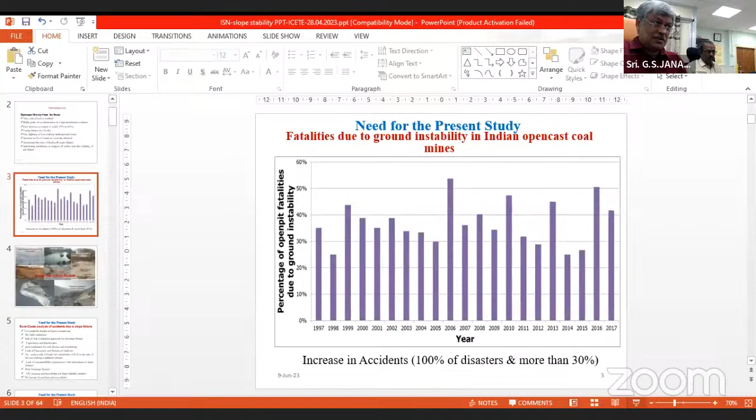So again I have to repeat all those things. As I said, open cast mining accounts for most of the production in India, and even in other countries.

In India mostly 95%, in other countries 85%, 75 to 80% comes from open cast mining only, because it is a cost effective method, and underground mines are loss making. Advanced technologies, from exploration to transportation of the ore, allow you to automate it because of IoT technologies.

With manless drilling, manless shovels, manless dumpers, and manless trains also, that are operating. If you go to Australia, there is one mine where everything is operated with digitization only. By sitting in a room, you can operate shovels, drills, and dumpers. That much technology is available.

Because of that much technology, open cast mining is going deeper and deeper. We can see in future up to 1,000-meter depth also, because of the new technologies that we are inventing and discovering.

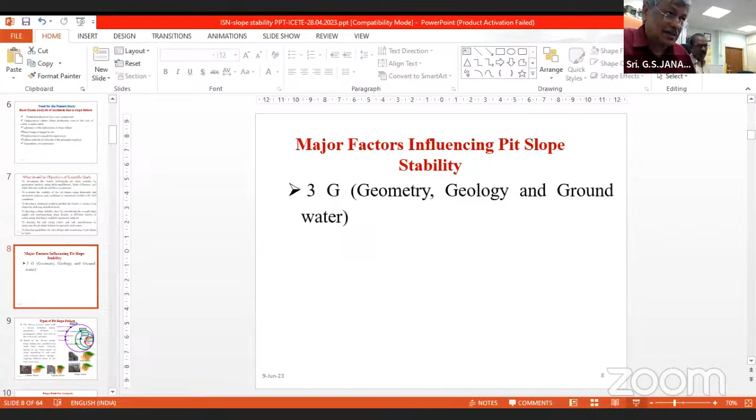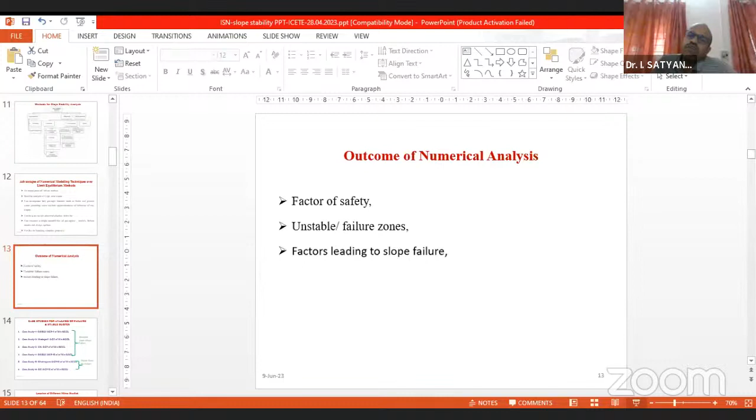Okay. The major outcome of the numerical analysis should be not only the factor of safety. What are the factors that are leading to slope failure? Where are the unstable or failure zones happening within this section of the strata? That we need to observe. Most of the studies, if you see, they give the factor of safety. That is not the major area we need to be concerned with. What is the strata where the failure is happening? That strata we need to consider. We need to stabilize it, like using shotcreting, using rock bolting, using cable bolting; like that we can stabilize it.

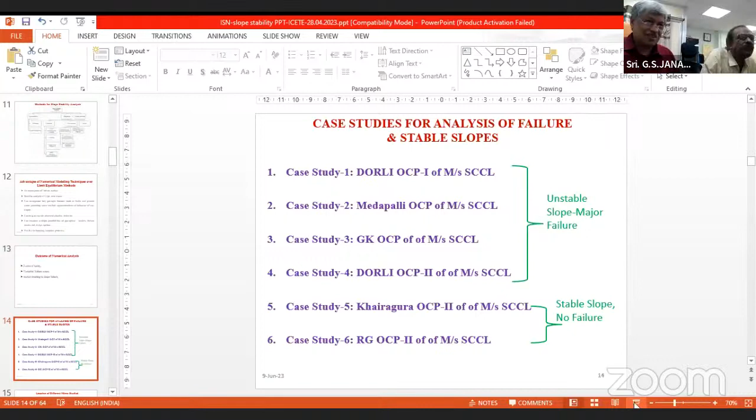So now I am going to the 14th slide. Is it visible? No, sir, 13 is visible on the screen. Otherwise, I will do like this only. Yeah, now the 14th slide is visible, sir. Okay, I do not go to the slideshow. Slideshow is not showing it. I will make it bigger, full screen.

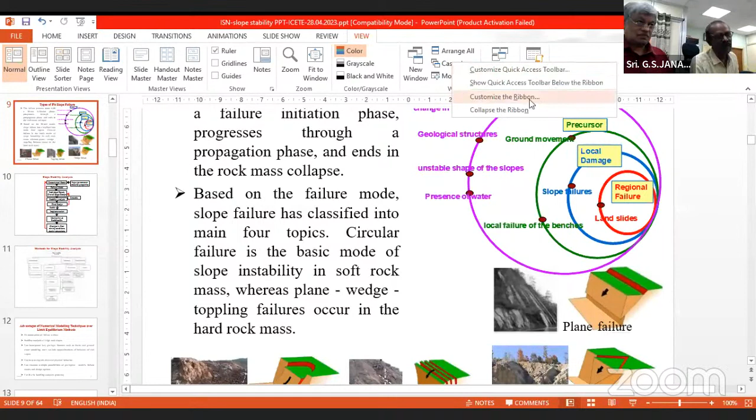Okay, that's why, sir, I am not going for a slideshow.

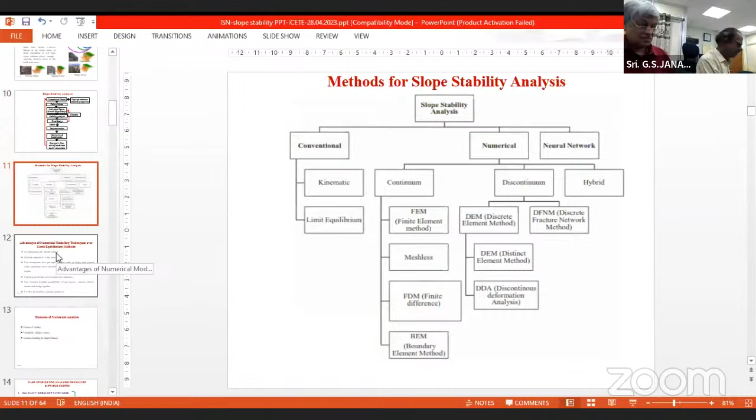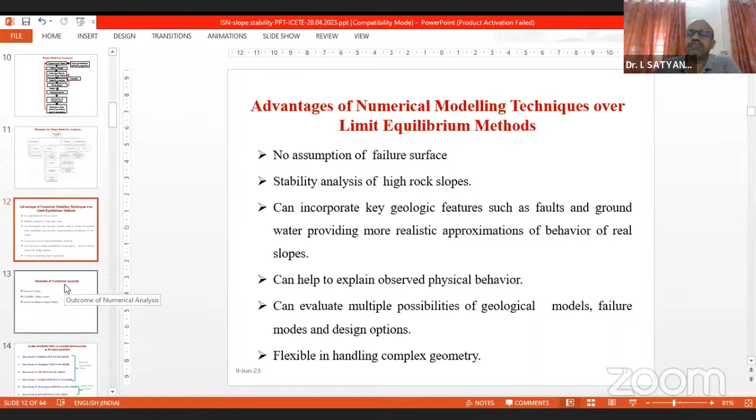These are methods for slope stability analysis, sir. Next, advantages. This I am not explaining because it is available in the literature and there is shortage of time. I will directly go to the case studies.

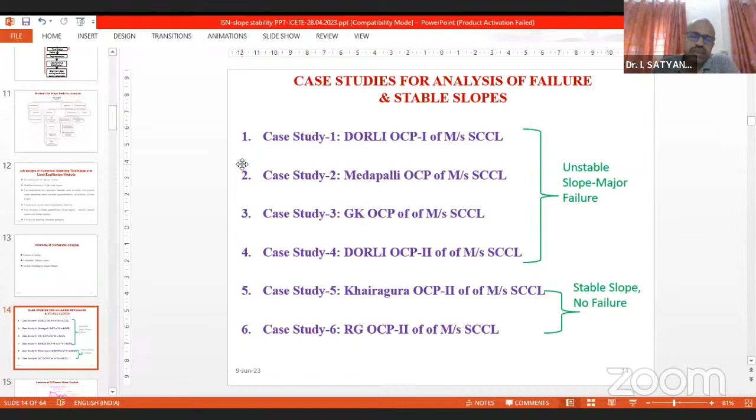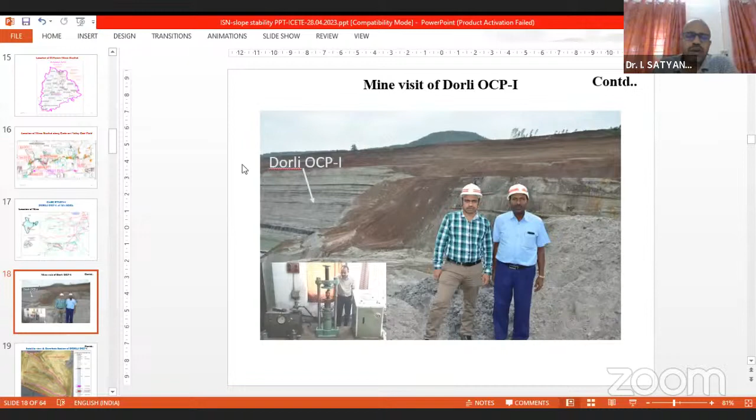I am explaining the Dorli OCP1 case study. I went to that field. I collected the data, borehole data and samples. I analyzed them in the laboratory. I then estimated the properties using the triaxial test: internal friction angle, cohesion, density. Those properties are used in the analysis.

In situ properties should be converted to rock mass properties before we go for the model. Rock mass properties will cover the fractures, inherent fractures, inherent disturbances. So rock mass properties are always lesser than the in situ properties.

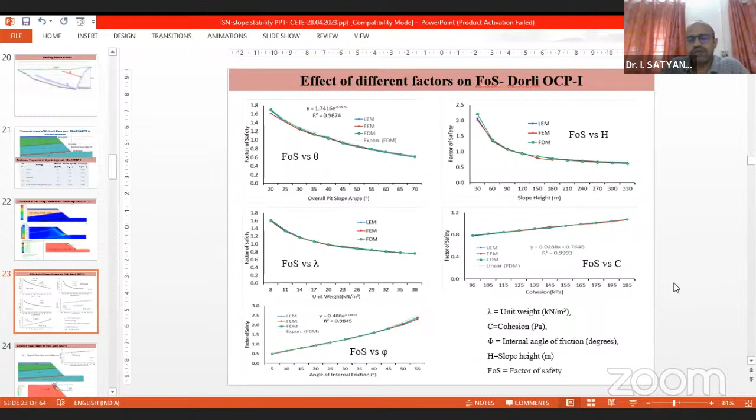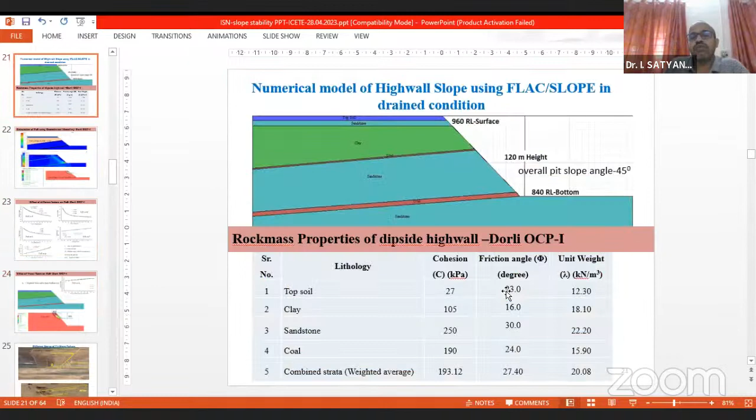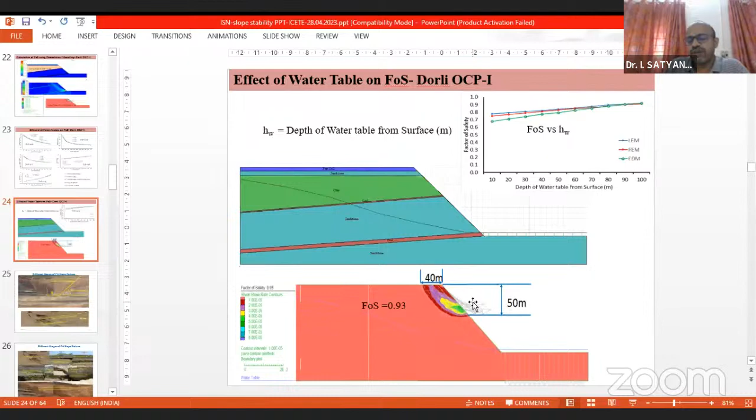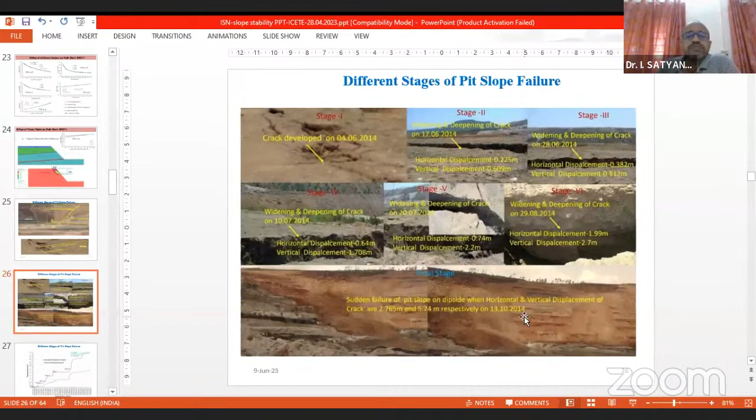If you see the horizontal displacement at different stages, stage 2, stage 3, stage 4, stage 6, finally the cumulative horizontal and vertical displacement rose up to 5 meters. After 5 meters of vertical displacement, there was a catastrophic failure.

And during that period, if you observe, from 4th June to 13th October there was heavy rainfall. Every factor we need to evaluate to find what is the actual root cause of the failure. We need to analyze everything.

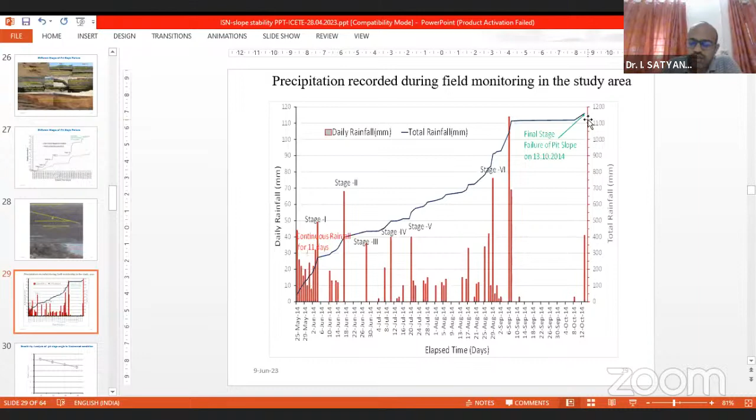So at that time, if you consider the rainfall, there was continuous rainfall for 11 days, and up to around 1200 mm rainfall occurred within those 4 months. So that is also one contributing factor to the slope failure. So that happened. Then what do we need to do? The slope failure occurred, but we have to run the mine.

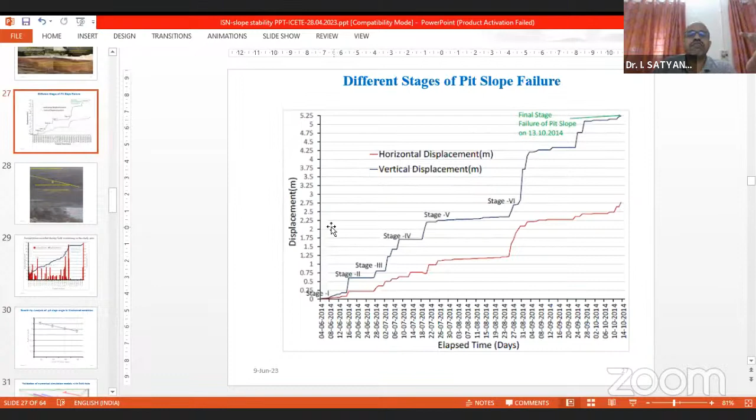Ultimately, with the slope stability analysis, we got the optimum pit slope angle at which that mine should run. If you compute the vertical displacement through the FEM stability analysis method, the vertical displacement is 5 meters and the horizontal displacement is 3 meters. These match the actual situation. If you see this slide, the actual vertical displacement is around 5.25 and horizontal displacement around 2.75. So the modeling results and the actual field results almost match.

This is the vertical displacement. If you see this figure, you can get it. What I mean to say is that field validation is always very, very important to get accurate results. This modeling result matches the field results, so our model is accurate. So finally, these are the conclusions for that mine.

Now coming to the sensitivity analysis using SPSS, separate statistical analysis software, there are 5 major factors. One is the pit slope angle, and the others are density, cohesion, internal friction angle, and groundwater. Out of these, groundwater is the most influencing factor. How will each influence it? The relationship between the factor of safety and the overall pit slope angle is exponential. Internal friction angle and factor of safety is also exponential.

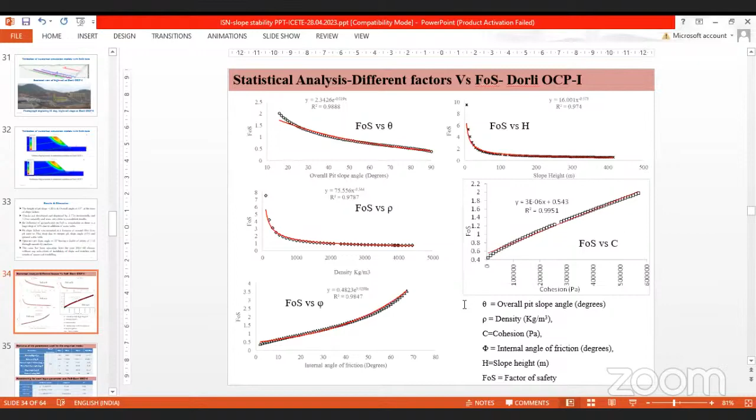And for density and overall pit depth, the slope height, the relationship is almost a power function. For cohesion, it is a linear equation. So this type of equations we need to develop. There is not much time for this one. There are different methods to check whether this statistical analysis is correct, whether it is statistically significant or not. We need to correlate with the R square value.

If you see these equations, factor of safety versus density, versus cohesion, different predictive models are developed with a single factor. If you change theta, the overall pit slope angle, it has a major impact on slope stability. So these are the power function, linear function, exponential function, and power function, different relationships with the factor of safety. Why are these accurate? Because the R square value is more than 0.95. So these relationships are accurate.

So these are the different ones. I need not go in depth because it is PhD level. This is the rho correlation coefficient, non-linear regression. These are all our parameters to validate the statistical equations. We need these parameters.

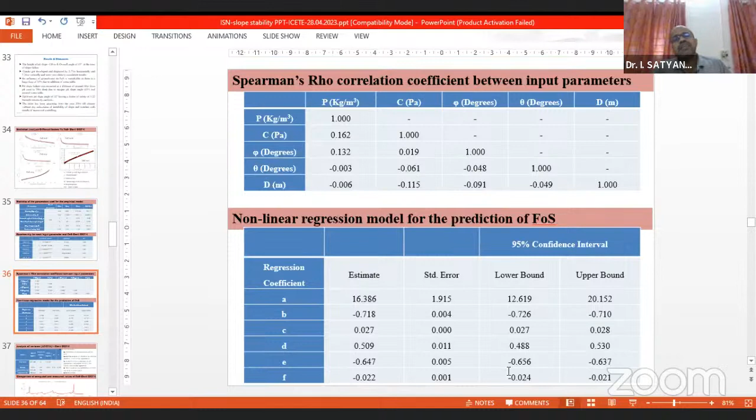So finally, we developed an ANOVA analysis. As I said already, there are different parameters to validate the factor of safety. Most analyses take only one parameter, like the R square value: if it is more than 0.7, then my formula is okay. That is not sufficient. We need to evaluate with the different parameters.

If you see the model evaluation, I have taken the coefficient R square value, I have taken the ANOVA, I have taken the Student's t-test within 95%, and there is a root mean square value. And the predicted model, meaning the statistical analysis and the numerical model, whether they are matching each other.

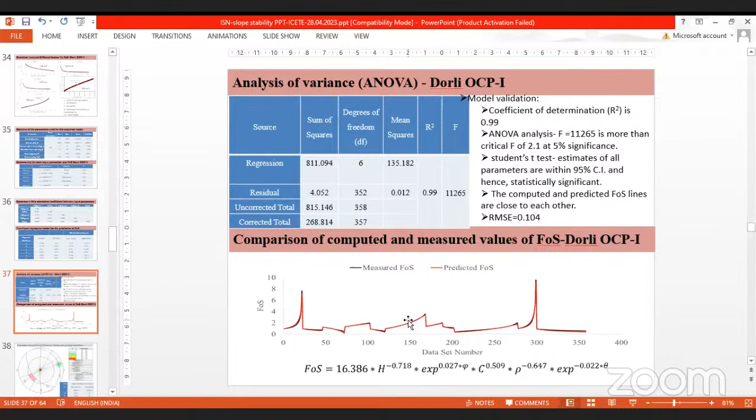If you see, the black line is the measured one. Measured means that it is got from the numerical analysis, the FEM analysis. And from the statistical analysis we get the red one, the predicted FOS. These are exactly matching with each other. So the factor of safety formula we got for this particular mine is accurate.

So using this formula, if there are any changes in the cohesion, the density, or the overall pit slope angle, you can get the factor of safety directly without going for the scientific analysis, because that will take a lot of time, at least 2 to 3 months. This is a ready-made formula. If you just substitute the parameters, you can get the factor of safety of that particular area.

If there are any joints, the effect of the joints on the slope failure needs to be evaluated using kinematic analysis. I don't want to go into depth because it will take another 30 to 40 minutes to explain these stereo plots. So first we need to do the kinematic analysis, whether the joints have an effect on the slope failure. Generally because of the joints, toppling, wedge or planar failures will occur.

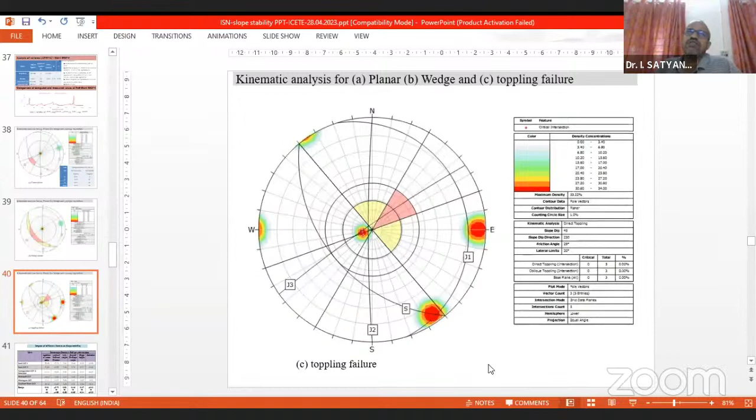What is the process? First, we need to do the kinematic analysis. We need to rule out whether the joints affect the slope or not. Then we go for the numerical modeling. This class would actually take 3 to 4 hours, so I'm skipping the unnecessary things.

Okay, this one. These are the impacts of different factors on the 6 mines that were studied. If you see here, the water table: the percentage change, where minus indicates a decrease and plus indicates an increase. Almost 10 to 33%, the factor of safety will decrease due to an increase in the water table. If you increase the water table by 1 meter, that will affect it by around 10 to 33%.

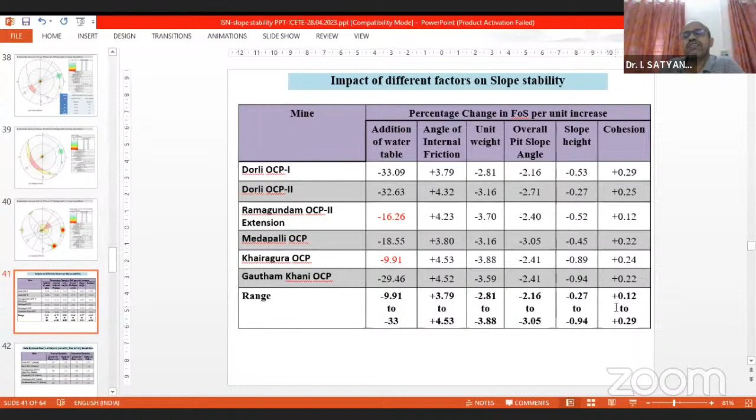So the most sensitive factor is the water table. Next comes the internal friction angle, next the unit weight, next the slope angle. So by sensitivity ratio, the major factor is the water table, and the least factor is the cohesion. Cohesion shows a very small change, 0.1 to 0.29. So the major factor is the water table and the least factor is the cohesion.

Different for all those mines, the optimum pit slope angle design. Even Ramagundam OCP, if you go and see, is operating at 38 degrees only. If you calculate the overall pit slope angle, that mine is operating at 38 degrees only. So these are the different optimum pit designs that we suggested, because as I went there, I took the

Sir very much knows Ramalingam sir, because he gave permission when he was GM. He gave me the permission to take the samples from the mines, to do the analysis and to get the data from the mines. So it took almost 6 years to study.

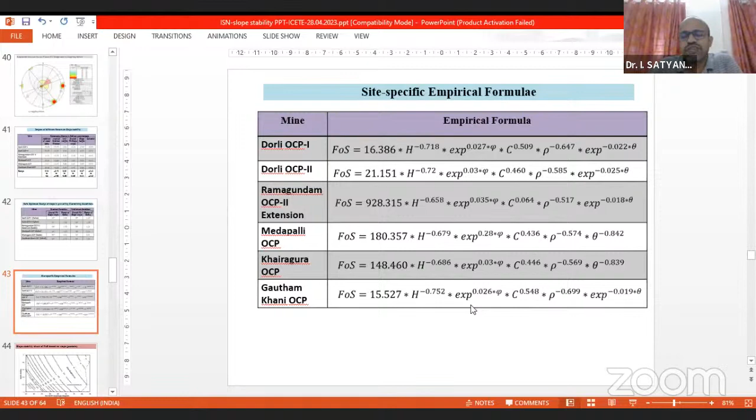For individual mines, I have suggested a factor of safety for that particular mine. With one formula, by directly substituting the parameters, they can get the factor of safety without going for the scientific study. So this is a chart that I want all the scientific agencies to suggest for each mine. By seeing this chart, we can get the factor of safety.

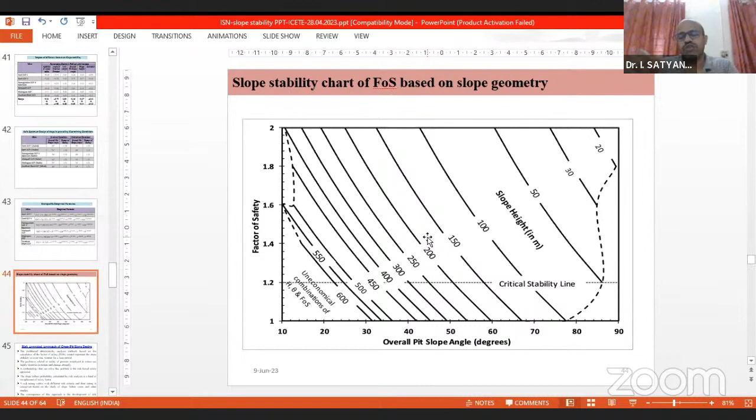If you provide this chart to the mine management, they can get it, because as the mines go deeper and deeper, the factor of safety will vary depending on the depth of the mine and pit slope angle. So this type of chart should be suggested in the scientific study. This one is very important. The scientific analysis is one part. Based on the scientific analysis alone, we cannot 100% avoid the slope failures and the dangers due to slope failures.

We need to do risk analysis. That is what we implemented as DGMS; we suggested it for the safety management plan. In the safety management plan, there should be a separate chapter for pit slope analysis. What are the factors contributing to the failure? What are the risks contributing to it? So risk analysis should be complementary to slope failure analysis. Risk analysis combined with slope failure analysis, that way we can 100% avoid these slope failures.

So there are many factors concerned in the risk rating criteria. For developing this, I have published one paper. I took around 100 slope failure cases. Based on them, what are the principal factors, the operational factors, and the historical factors. We broadly categorized them into 3 categories and gave ratings on a scale of 1 to 10 and 1 to 5. For the major risk factors, the scale is 1 to 10, and for the operational and historical factors, the scale is 1 to 5.

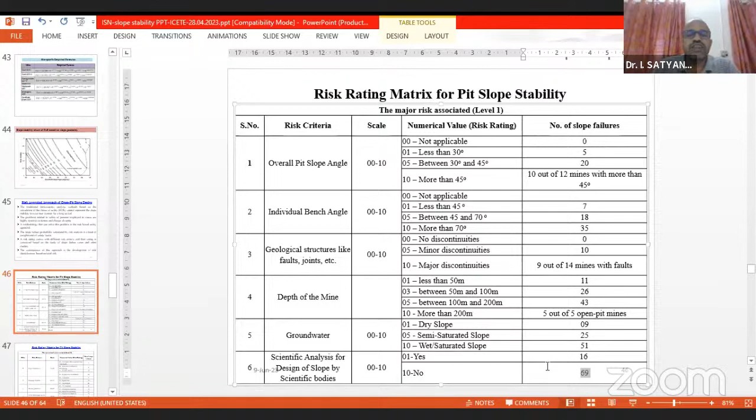So these are the different major factors. There are 6 major risk factors. Coming to the operational factors: if you are monitoring, then you are safe. If you are providing a good drainage system, then it is safe. If you are following a control blasting system, or if there is no blasting, then it is safe. Even if you go for deep hole blasting, if you do control blasting, then it is safe. With mechanization, if you use IoT technologies and avoid manual intervention, all those things should be considered during operation. So: slope monitoring, drainage system, blasting practices, and mechanization.

Coming to the history, sir. Sachin, sir. Yeah. Sir, the second panelist is also waiting. That's why I'm skipping. This will start at 7:30. Okay. Shall I close now? Yeah, with your concluding remarks, you can close, sir. Okay, I will give the concluding remarks.

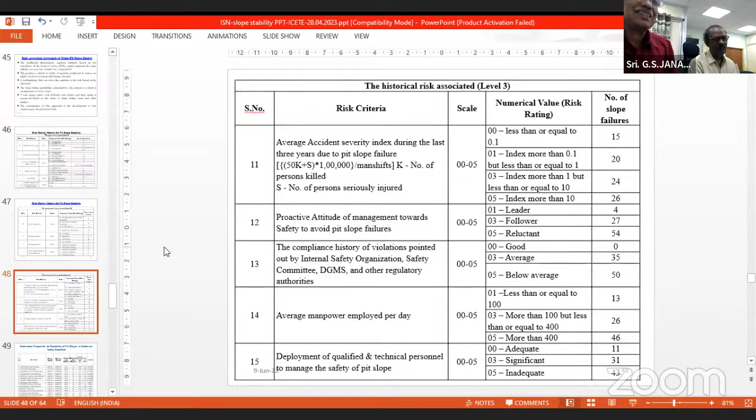These are the risk rating matrix that every scientific study should propose for an individual mine. Coming to the correlation between the risk rating matrix and the scientific study, that should be done. For that correlation, I analyzed around 15 cases of numerical study, and we got the factor of safety through the numerical study, and correlated it with the risk. This is across different mines; around 13 mines we took for the correlation, because if you have a lot of data, your results will be accurate.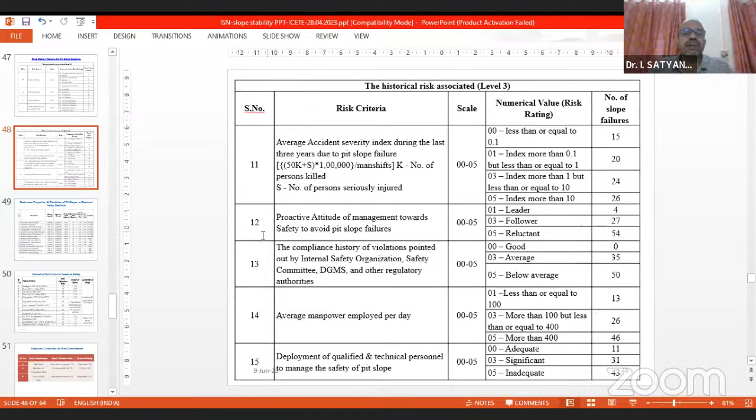So for 13 mines, what is the risk rating? What is the collective risk by combining all those 15 parameters? This is the rating given for each individual parameter out of 15 parameters, then we combine them to get the total risk factor. So for the condition of the slope, if you take the total risk as 81, more than 70, in all cases the factor of safety is less than 1. Up to 72, the factor of safety is also less than 1.

What does this mean? If the total risk is more than 70, it is high risk, because the factor of safety comes out less than 1. This means if the total risk is more than 70, there is definitely a slope failure. Similarly, if the total risk is less than 40, the factor of safety is more than 1.2, which is more safe and stable.

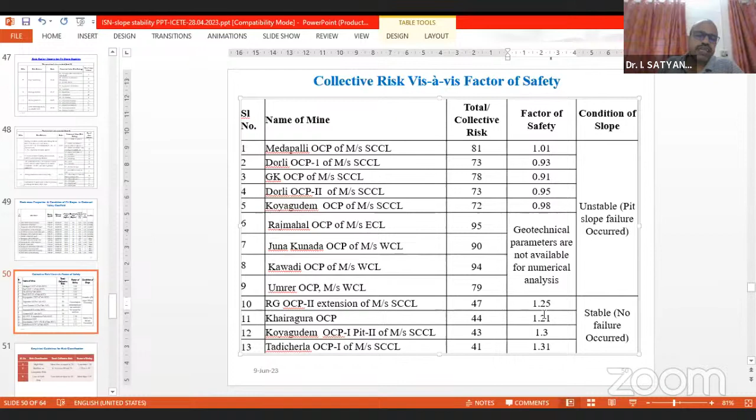So there is a risk classification empirical guideline you can use. High risk is more than or equal to 70, with factor of safety less than 1. Medium or acceptable risk is when the collective risk is 30 to 70 — that is acceptable risk, with some risk taken, because we cannot avoid total risk. We need to operate by taking some calculated risk.

Otherwise we may enter into losses, because even a single degree of steepening of the slope requires removing a vast volume of overburden. So optimization is very important. We need to take a calculated risk for safe and profitable operation of the mines. So this is the risk rating.

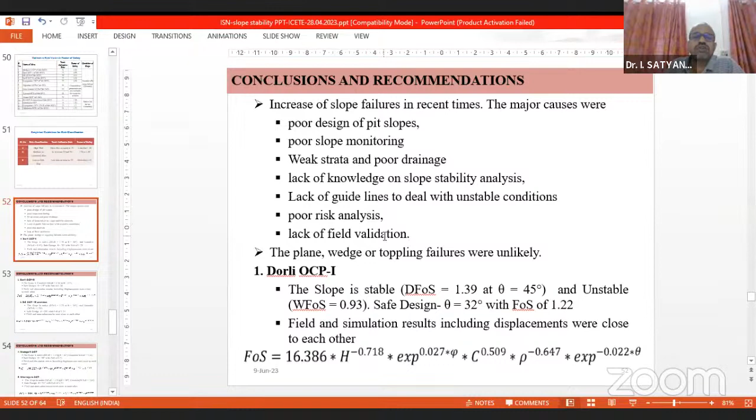These are the conclusions: poor design, poor slope monitoring, poor data, lack of knowledge, lack of guidelines, and poor risk analysis — these are the major factors contributing to slope failures, along with differing factors of safety.

So the optimum design pit slope angle is 31 to 35 degrees when the height varies from 120 meters to 200 meters. This analysis I did for RG42. If the height increases to 407 meters, then the overall pit slope angle has to decrease to 29 degrees.

The simulation results of the three different methods come within 1% of each other — the error is within 1%. This means the models are very accurate, and they are more sensitive to some factors like groundwater and frictional angle, and less sensitive to other factors like cohesion, as I already mentioned.

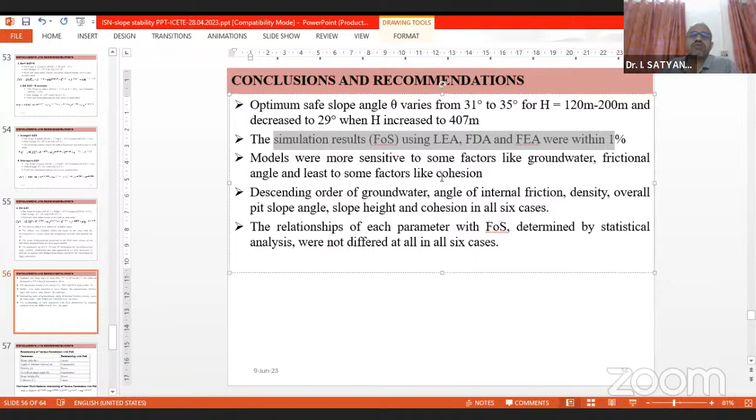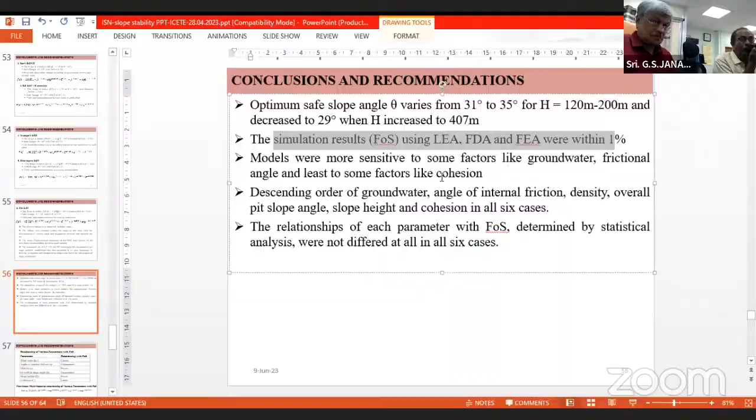From Kothagudem to Adilabad, there are different strata conditions. This formula can be used to calculate at the ready.

Due to time constraints, I need to finish now. I couldn't explain everything in detail because it would take another 2 to 3 hours to cover it fully. So with this, I conclude.

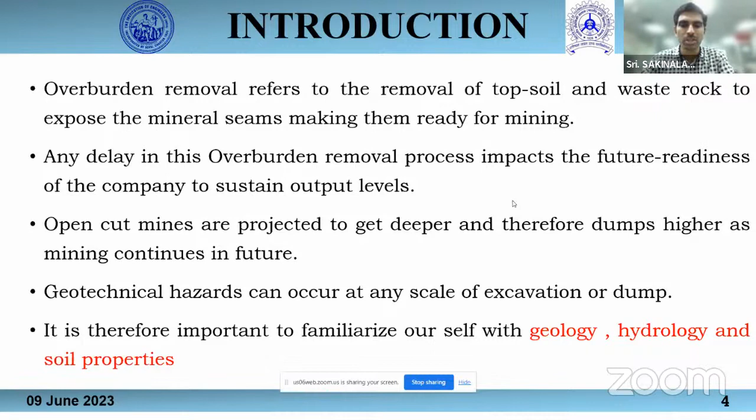And later on, this is a general topic. So from 1901 to 2016, there were 23 accidents taken just on the overburden slope failure. In that, 143 fatalities took place from these 23 accidents. And these are the few accidents which have taken place.

I'm going to show you the slides. And willingly, mindfully, I have neglected the open cast Rajmahal open cast fatality, because everyone knows what happened over there - it happened mainly due to lack of human error, and there was no proper inspection of this OB, no scientific studies were taken place, and no one was taking care of this. So that's a different case, so I'm not going into that.

But what are the actions taken in the rest of the mines are shown here. All these mines' actions taken place have their scientific study. It's not that there is no scientific study conducted on the dumps, or on the bench height stability, nothing there. They have done the analysis, and they have got approval from the DGMS. Then only they maintain this mine.

But though these actions are taking place, even the previous panelists had told that though the scientific studies have taken place, 16 accidents have taken place. So this raises a question: why has the accident taken place? So this is a very important question.

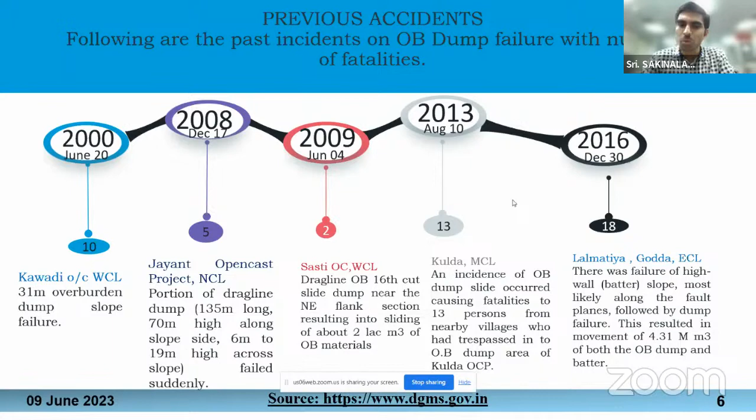So we will discuss the different methods later on. What are the different methods that were there? Each and every method has its own advantages and limitations. But the problem, as I told you, is what type of analysis method should be implemented for a particular type of geology. So that's what I'm going to discuss in the later slides.

So here comes the parameters affecting the slope. So the first one is slope dump geometry. Here comes factors like height of the bench or the dump and slope, zonation, what are the potential failure surfaces, what type of geometry was there.

And the next very important topic is foundation strength. As per my knowledge, very few mines have done scientific study on this foundation strength, and in a lot of cases the dump failure has taken place due to construction happening where there was very less foundation strength. They conducted the dumps on that, so that causes the failure of the dumps. So factors like foundation soil depth, moisture content, grain size or density - all these parameters also take place.

Thereafter, groundwater conditions - so what are the levels of groundwater, and what is the rainfall, what is the vegetation, topography, what is the moisture content in that dump or slope. So these also play a vital role.

Next comes the soil strength. So this one is soil percentage. What is the soil percentage? In the soil which was developed, the amount of soil, because soil is very soft in nature and usually tends to slide. So this causes the instability in the dumps. So these are very important parameters.

And the second one is slakeable rock. What is the slakeable rock? Generally, when the extraction or blasting or something else is taking place, the hard rock which was there is broken into very fine particles. That is called slakeable rock.

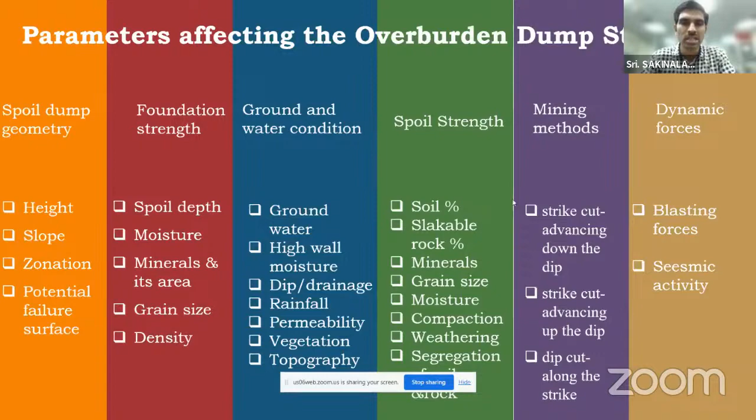So here comes the mechanism of failure, how generally the dump fails actually. The basis of this failure is the increase in the shear stress and reduction in the shear strength along the failure plane. That causes the failure in the slope. But there are two types of failure; the mechanism I will explain later on. One is due to the forces acting horizontally and vertically on the plane, and second one is the non-linear force causing the angular change in the soil.

When it comes to circular failure, this becomes very important, because moment of inertia plays a vital role in circular failures. And when it comes to plane failure and wedge failure, the failure takes place because of the horizontal and vertical forces. This will be discussed in the later slides.

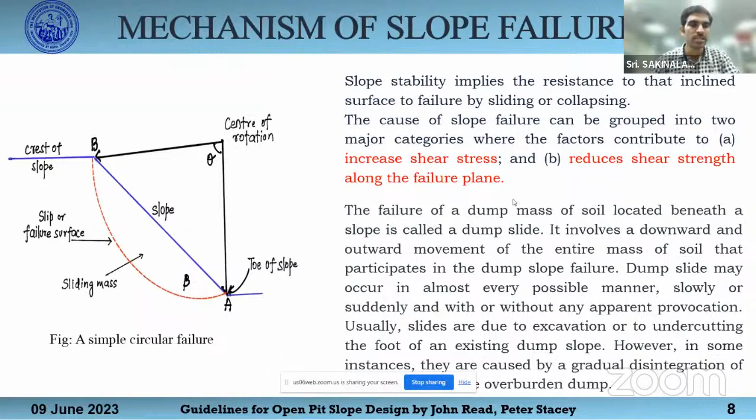Whatever dump slope stability analysis was taken, all were based on the concept of the limit equilibrium method. So what is this concept of limit equilibrium method? Generally, limit equilibrium assumes that the shear stress along the assumed failure surface equals the shear strength of the dump, which in simple terms means the factor of safety is equal to 1. Whatever the driving force causing the failure, that is equal to the shear strength. This was the meaning of the concept of limit equilibrium.

And here are a few formulas for this. This one I already explained. The factor of safety is equal to shear strength by shear stress, that is equal to 1. Generally in the mines, we all know that if you want an approval from the DGMS, the factor of safety should be between 1.2 and 1.4 in opencast mines. This is as per Wyllie and Mah, 2004.

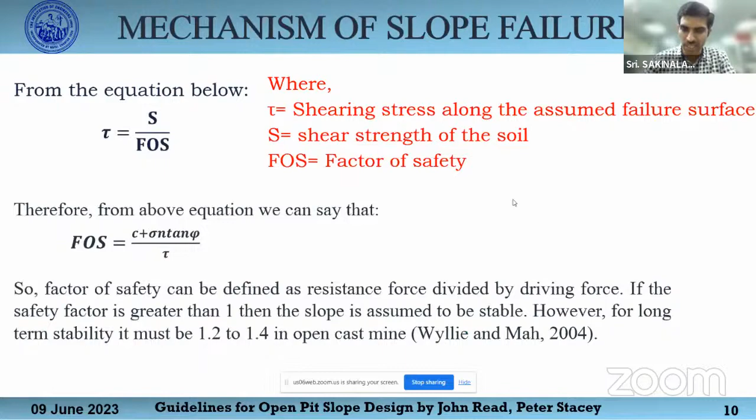The second failure is wedge failure. This is another classical example, where wedge failure occurs in a rock mass with 2 or more sets of discontinuities. Plane failure consists of only a single discontinuity, and the failure happens along that single discontinuity. But wedge failure consists of 2 or more sets of discontinuities, and the failure takes place along those sets of discontinuities.

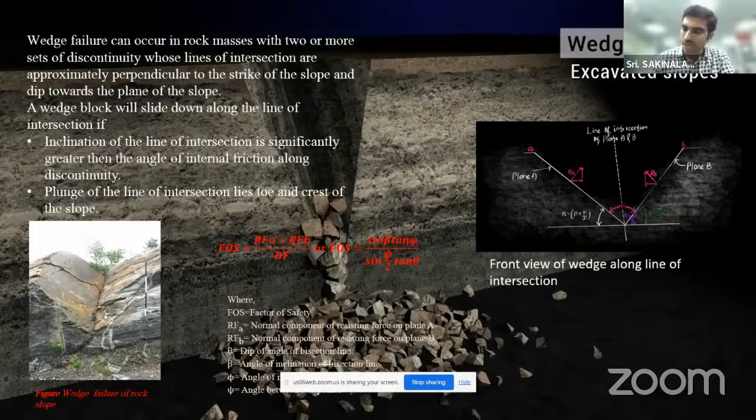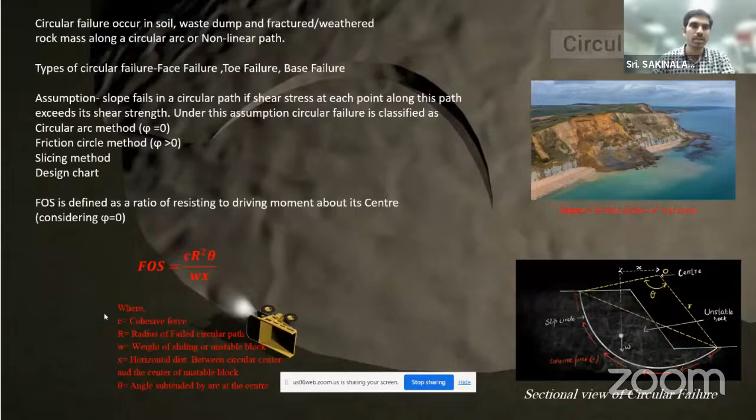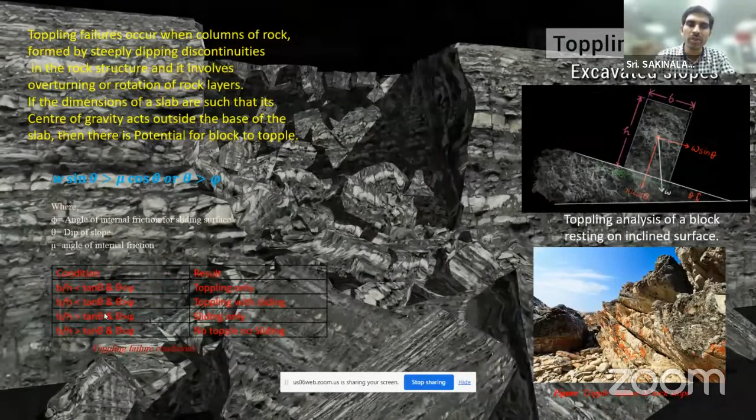And the next one is toppling failure. This failure happens when there are steeply dipping discontinuities, causing toppling from the surface. It takes place block by block. So what are the conditions causing toppling failure? The condition shown here is that the width by height ratio is less than tan theta, where theta is the dip of the slope. If the width to height ratio is less than tan theta, then toppling will take place.

When the width to height ratio is less than tan theta and the angle of dip is greater than the angle of internal friction, then toppling with sliding takes place. Another criterion is the width to height ratio greater than tan theta with the angle of dip greater than the angle of internal friction. And when the width to height ratio is greater than tan theta and the angle of dip is less than the angle of internal friction, no toppling and no sliding will take place.

These are the few criteria for how this causes only toppling failure, or toppling failure with sliding, or only sliding. The sliding is just a planar failure.

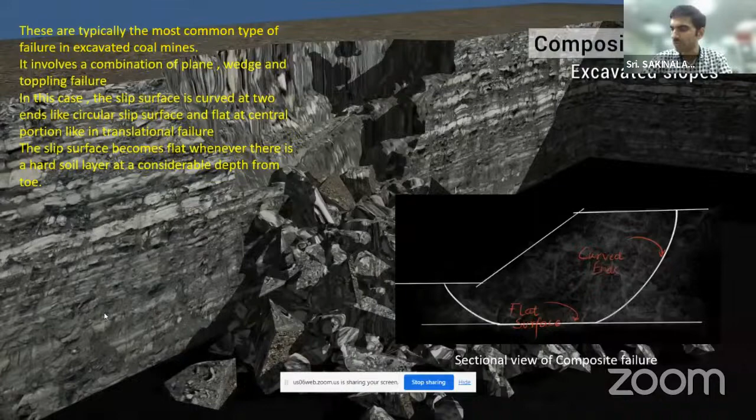And this is another one, composite failure, which is a combination of all the failures like plane failure, wedge failure, and toppling failure. This is the most common phenomenon in the coal mines. When it comes to the coal mine, this is the most common phenomenon, the combination of all these failures.

And here comes the overall limit equilibrium methods. There are various methods available. One more thing I need to say: how do we decide whether the slope will fail as planar failure, circular failure, wedge failure, or toppling failure? How do we come to know? For this, we have to do an analysis called kinematic analysis.

In kinematic analysis there's a graph called the stereograph. I'm not showing it here because it's a huge topic to cover, but I'll give the basic idea of how to know the type of failure. Using the stereograph, as I explained with the width to height ratio, there are conditions. If a certain condition is there, it causes toppling failure.

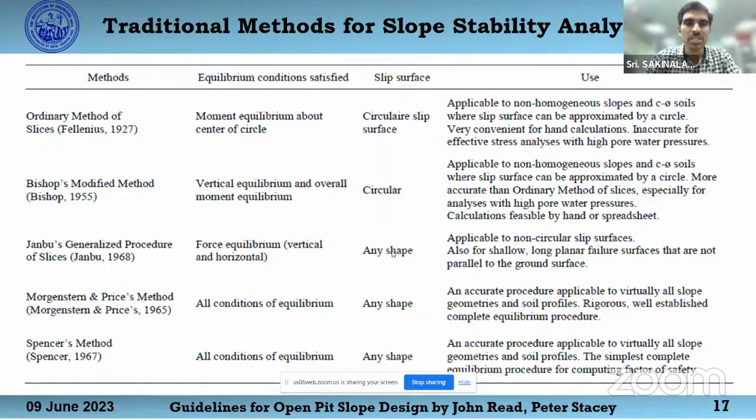So here comes the topic. In these traditional methods, the problem actually is, all the methods we have discussed till now were evaluated based on the principle of statics, meaning horizontal forces, vertical forces, moment. But the very important thing for the failure that is neglected is strain and displacement. One more thing neglected is internal deformation, because in the dumps, after forming the slopes, spoil dumps take some time for settling. So what deformations take place after the settlement, and whether brittle fracture developed or not. And another very important thing is progressive creep nature.

What is this creep nature? What this tells is, as the time goes on, the cohesion between these particles tends to get weaker. Once this cohesion gets weaker, it will obviously fail. Generally, the term for this is strain softening. You might have done some analysis with stress and strain when you do the triaxial test. You draw a graph of stress and strain. At the top of the peak, the sample will fail. But even though the sample fails, some strains will develop. This is called strain softening.

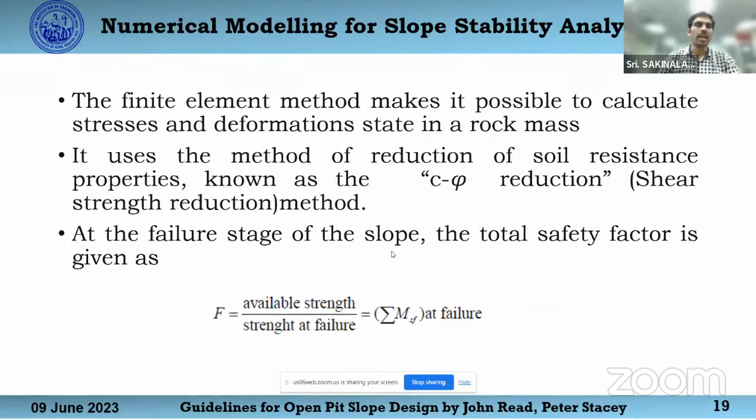So what different types of methods were there? Basically, these numerical methods were divided into two types. One is the continuum method and another is the discontinuum method. What is the continuum method? The continuum method assumes that all the material is homogeneous, right? We treat it as homogeneous because in the finite element method, as I told you, a large bulk of OB, a large mass, is considered. So while considering a large mass, whatever discontinuities are there, we treat it as a continuum model. So okay, fine. Now the continuum model we are doing.

Then what is the difference between the finite element method and the finite difference method? Both have the same working principle, but the difference is the mesh. As everyone knows, suppose we are at a topography. The topography is divided into very small particles, and the finer these nodes or meshes are divided, your accuracy will increase. Now take an example of some surface. We know the surface won't be even; there will be some undulating surface. So how will we do this? In the finite element method, the meshing is done in the form of triangles. If you see this example over here, these blocks are divided into triangles.

Vikram sir. Sir. Hello. Vikram sir. Sir. Please conclude in 5 minutes. It's going past 8 o'clock. Oh, sorry sir, lot more to be done, sir. Okay, sir. I will make sure that I'll go through very fast. 5 minutes. So, 5 to 10 minutes. Okay, sir. Thanks.

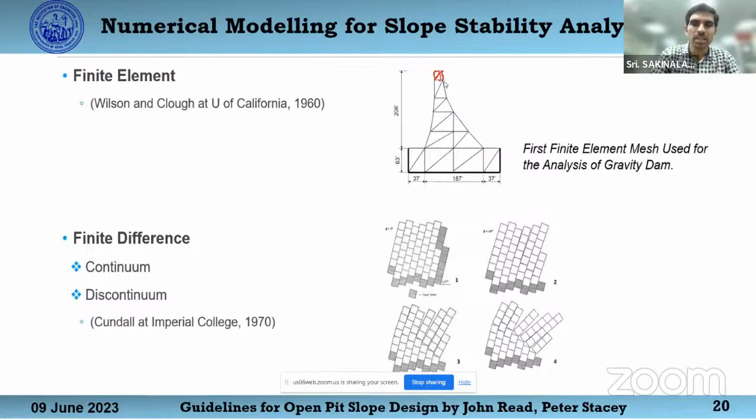So this is the basic concept. I won't take much time. But the basic difference is the mesh, right? Here is a triangle mesh, and here comes the rectangle or square mesh. That is the finite difference method. So this is what works behind these numerical methods. I don't want to discuss this further; we'll go to the next.

So here comes the hybrid method. Why use these hybrid methods? Because, as I told you, a large mass may have discontinuities in one place and none in another. So we have to cover both discontinuous and non-discontinuous parts. So the hybrid method was developed. One such method is the lattice method. You see this graph over here. All these nodes are there. These are springs. We call them springs.

So these springs. Okay. So we divide these springs, and we'll apply some forces on them. Once the forces are greater than the shear force, the failure takes place along the joint plane. This is the discontinuity. The red color shown is the discontinuity. You can see here, this is a discontinuity, and these are shear forces. This one is shear force, and these are vertical forces.

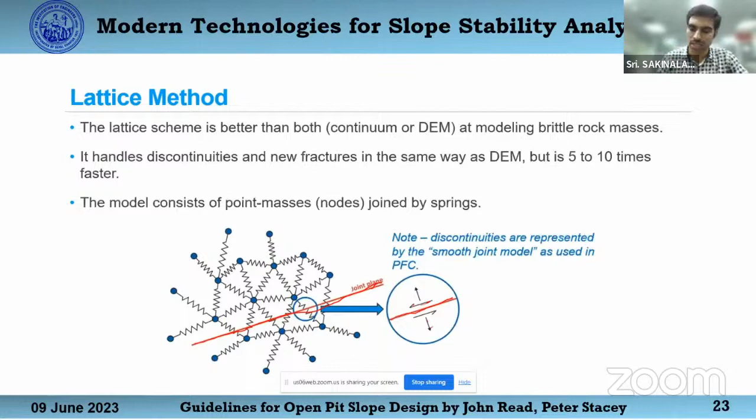Right. This is one type of method, and the next method is the material point method. Here there is no meshing at all. In the previous method, I told you each and every part was divided into a very fine mesh. But in this method, there's no need for a mesh. So here we take where the largest strain, the largest displacement, is. We consider those zones in the material point method, and we evaluate and transfer.

After getting this transformation, we'll move to the continuum method. These are the only two methods available right now, but not many studies have taken place. Most of the methods we were using are the finite element method itself. So here come its advantages, which I already discussed, so I won't go again.

Here's a very important topic: how to decide whether to go with 2D or 3D methods. There are a few things to take care of. If your principal structures along the strike do not fall within this 20 to 30 degrees, there's no need to go for 2D structures.

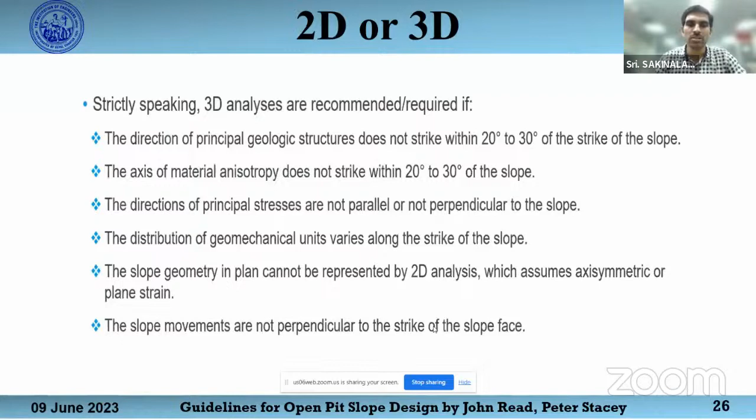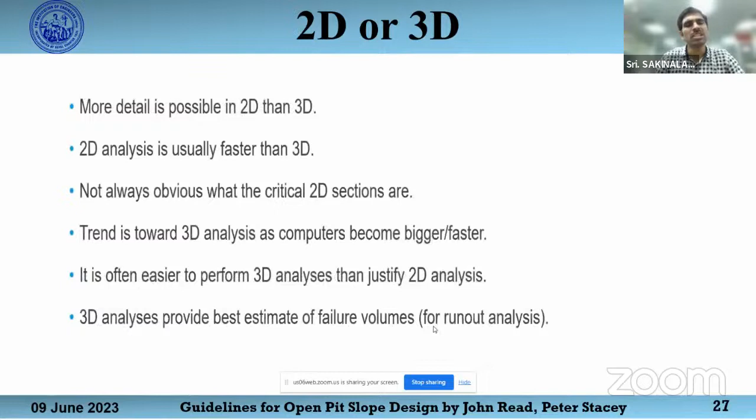The general trend nowadays is going for 3D, but that's not necessary actually. Some justification needs to be done on why to go for 3D and why not to go for 3D.

Next is another important topic: continuum and discontinuum methods. As I told you, when it comes to a larger scale, we neglect this discontinuum, but when you see a small, very small area, then comes the discontinuum methods. Here comes the experience of the geotechnical engineers, because they are the ones who have to decide whether to go with discontinuum or the continuum method, based on the number of discontinuities in the span of 1 meter of area.

So we take 1 meter of area and we'll see the number of discontinuities there. Based on that, we'll decide whether to go for discontinuum or continuum methods.

Another important thing to remember: when you go for continuum methods, the failure criteria considered is Mohr-Coulomb criteria. When it comes to discontinuum methods, the failure criteria to be considered is Hoek-Brown criteria, because Hoek-Brown criteria evaluates discontinuities. But with Mohr-Coulomb criteria, no discontinuities are included in the analysis. This point should be remembered when deciding whether to go for discontinuum and what failure criteria to use in the software analysis.

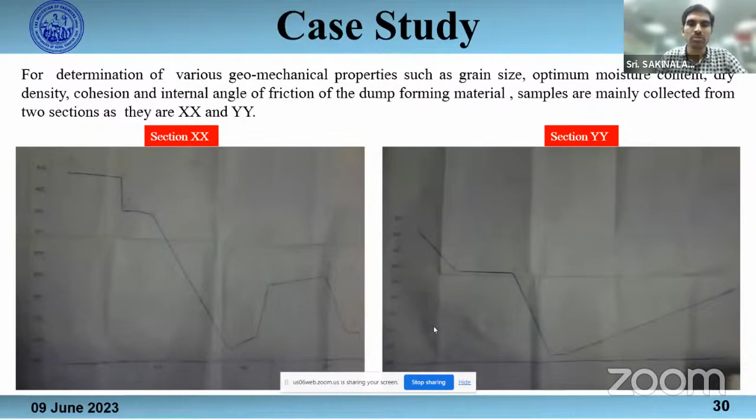Generally after preparing the rock mass, what parameters need to be evaluated? So there's unit weight, which we already call density, cohesion, internal friction, and pore water pressure. So how will all these things be measured?

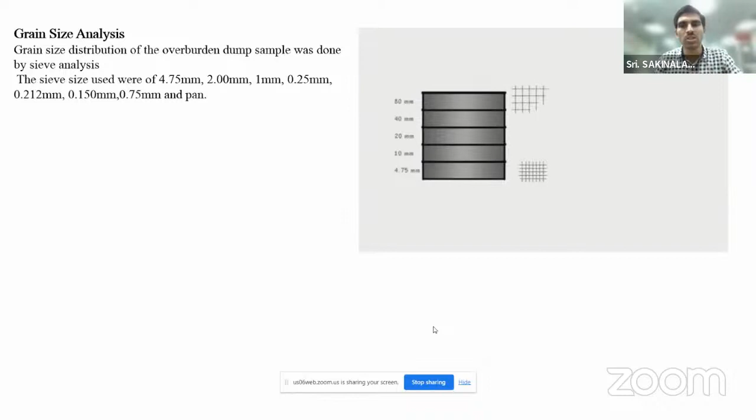First one is grain size analysis. This is a sieve - the sizes were there, and we used different mesh sizes. Once you put the material in, it will classify all those measures. So this is the procedure for doing this.

I'll quickly move to the next thing. A particular size was there - what type of particle was there? Because this gives a basic idea of what type of soil, the geometry of the soil. This is very important in analyzing the factor of safety.

Next comes the compaction test. What is the right way to do the compaction test? The compaction test is used to measure dry density and moisture. Here you see an example.

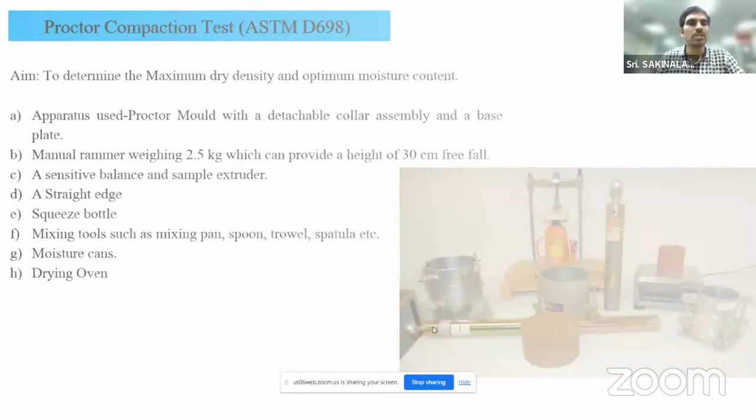I want to go further - just an image was there. There's a model shown here. I collected samples from the mines and put them in this, and as compaction was taking place, we kept them in the drying oven, so that we collect the weight before this sample preparation, and then after drying out the sample, we collect the weight.

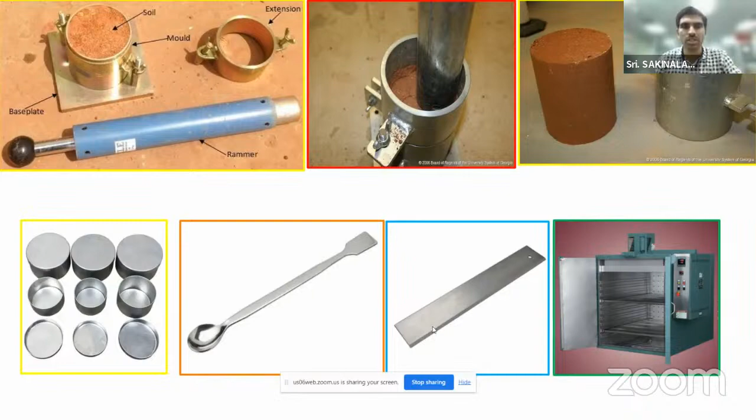Then we come to know what the moisture amount was there in the sample. So this is a parameter.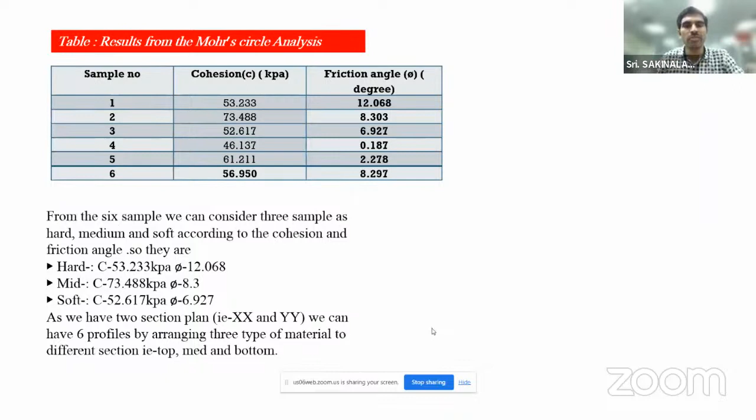Using this Mohr-Coulomb analysis, for all the 6 samples we got the cohesion and friction angle. These are very important. After getting the cohesion and friction angle, we use the Mohr-Coulomb criteria, and from this we get the shear strength. Once you get the shear strength, we already know the shear stress.

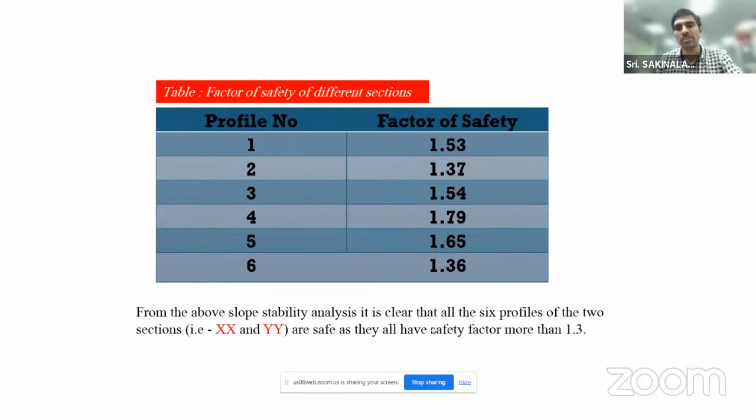So by implementing the factor of safety, if it was above 1, then the slope is stable. If it is below, that's a no-go. So there are software-generated images for section Y, fine, I'm not going to discuss about this. These are the 6 profiles out there. The factor of safety was always above 1, so there was no failure. So the next important topic, fine.

Once you have got the sample and done your established tables, now comes how to monitor these slopes. This is another case study I collected from the mine.

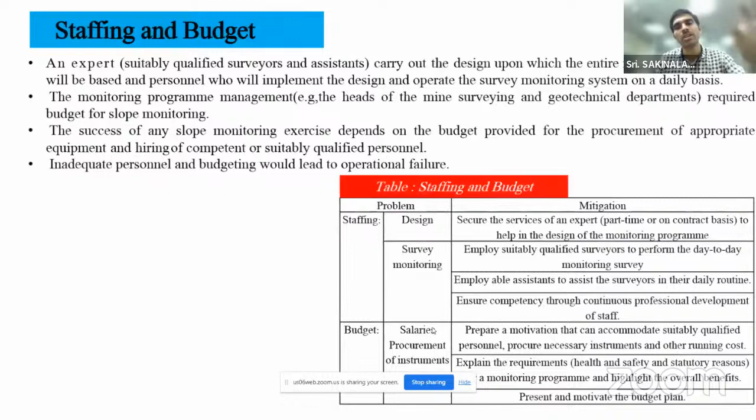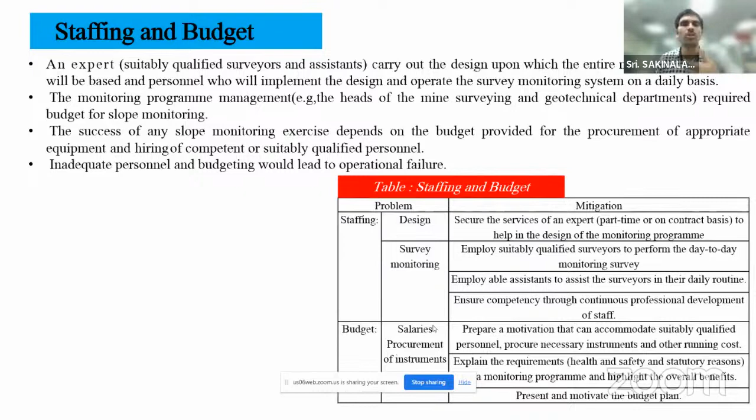In that mine, they were using a total station. Staffing was done and the total station was set up, and then the better points were identified. After this, the installation of the prism took place, and the total station was installed at the high wall, and with the OB, reflector points were installed at various places. Once the prism sends the signals and the reflector hits back, whatever collects the data will come to know the height, or the reduced level, of that point. Similarly, continual rotation takes place, and continuous 24/7 monitoring takes place.

But what are the problems with this? What are the limitations of this? One limitation is that this monitors only particular points itself. It needs a reflector established on the slope. Until you place the reflector, the data won't come for us. And the weather conditions are very important.

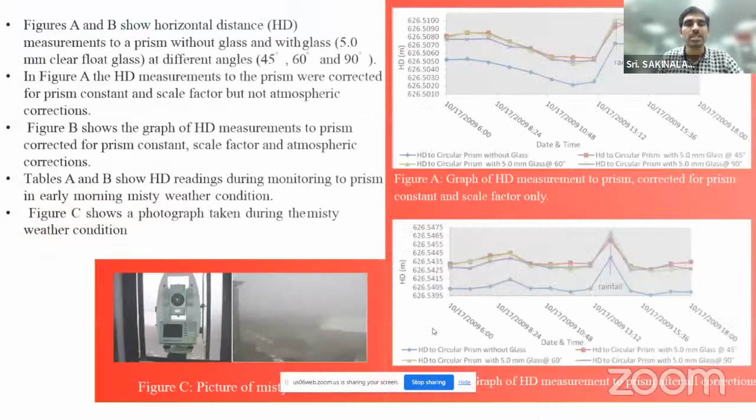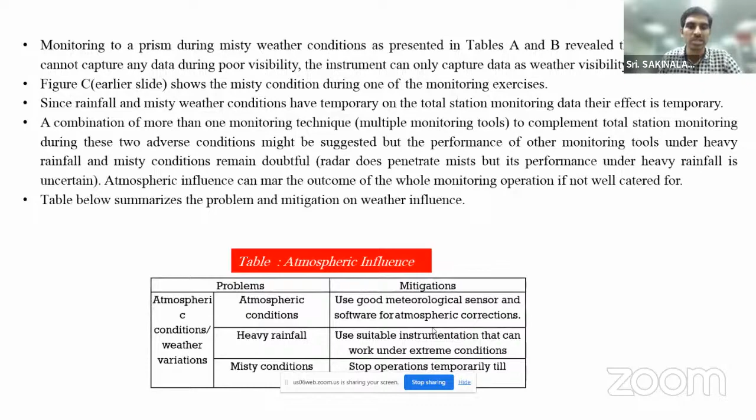If you see here, you can see the figure. There are misty conditions over here. Once you have misty conditions, the total station will drag and we won't get accurate results from this. These are the data collected from this prism. So all the problems were there: external conditions, heavy rainfall, the total station unable to work, and misty conditions. These are the limitations due to external conditions.

So once you got that, what are the techniques available for overcoming the limitations with the total station? These are the various slope monitoring techniques. One is visual, physical visualization - these are highly impossible for continuous monitoring. Next comes investigation instruments: photogrammetric, GPS, satellite images, and survey-based techniques.

And then comes the piezometer. These are used to measure the water column in the mines - how much it has increased or decreased, what is the state of the water column. By this you can get an idea whether to implement drainage or not, whether to remove the water column or not. This gives a basic idea.

Let me tell you about two very important technologies available till now: INSAR and LIDAR. INSAR is for Interferometric Synthetic Aperture Radar, and LIDAR is for Light Detection and Ranging. Both of these work on the principle of radar - they send the radar signal, it hits the object and reflects back, and once you get the reflection, it collects the data and gives a satellite image. INSAR mostly works using satellite images, and LIDAR mostly uses laser - the laser scans and gives an identification of what was happening there. These two are used for large bulk masses, where there's a large volume of mass, to detect whether movement of the mass is taking place or not.

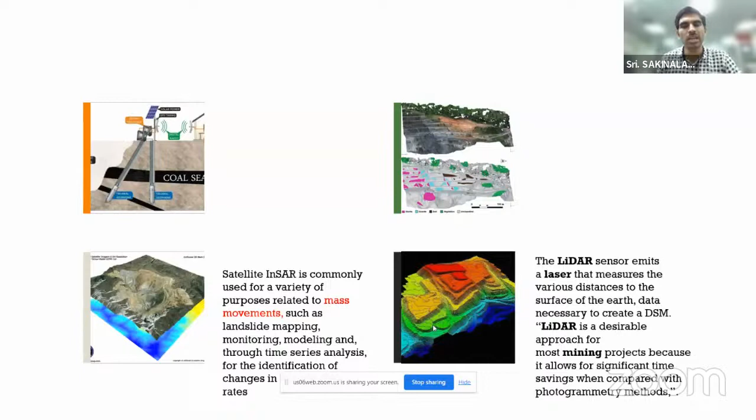INSAR will give very minute details, but LIDAR fails when compared with INSAR in terms of precision. However, when it comes to cost, LIDAR provides a cost efficient option. So most mines prefer this LIDAR technology.

Someone asked in the comments about guidelines for dump slopes. I can't really call these guidelines, because as a previous panelist mentioned, even though the internal angle of friction was about 36 degrees, the spoil still failed. So what might be the reason?

Based on the dealings or guidelines, as per my knowledge subject to correction, what they have done is use experience and thumb rules. But these thumb rules don't always work on all types of rocks, because the geometry keeps changing, and as I told you, the time-dependent creep nature plays a vital role in failure of the dumps.

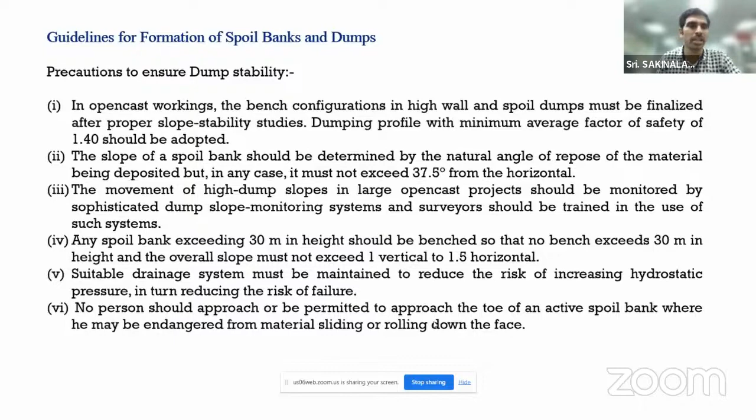So a scientific parametric study has to be conducted, as I discussed with the other panelists. All those studies need to be carried out. So what are the minimum technologies available as of now?

This is friction piles, another very important method. As I said, the piles are dug into the underground so that they get the capacity to block the failure of the OB. And this is another important factor, retaining walls.

These are used where a borehole is dug into the surface. Retaining walls are mostly used where there is water - if water is present, or on a hillside with water retained, whatever aquifer exists, the water comes into these retaining walls, and through them you can remove this water.

Another very important one is geogrid. This grid is constructed along the spoil once it's developed.

Next one is sheet piling, another type of stabilization technique. Sheet piles are generated and constructed in the floor of the OB. These are two very important methods.

We generally see these in hilly areas - this is the rock bolt system. You all know the rock bolt concept - the loose material has to be attached with the hard rock through shear strength. Rock bolts attach both the soft and hard rocks.

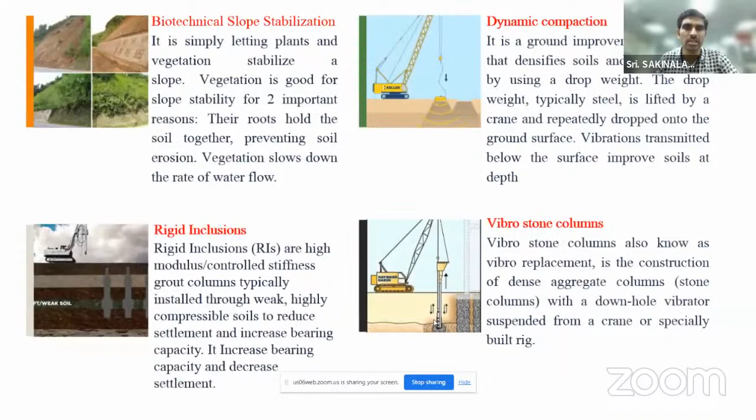Another one is biotechnical slope stabilization, where vegetation is used for stability - planting is common wherever slopes exist. The plant roots hold the loose material of the spoils.

And dynamic compaction - nowadays we use this on OBs. What we do is use a dragline or whatever machine is available to drop weight loads, which creates compaction in the OB. If used better, we can use a dozer for dozing materials and other things.

So previous panelists had told that though scientific studies are conducted, the failures are taking place. So here there is a lack of understanding of what type of failure mechanism to be implemented. Subject to correction, the previous panelist has told that there's not much difference between the Mohr-Coulomb criteria and Hoek-Brown criteria. So sorry to say this, but there is a variation between these two, because Mohr-Coulomb criteria

are meant only for homogeneous material and no discontinuities were included. But when it comes to the Hoek-Brown criteria, they include the discontinuities and non-homogeneous, isotropic and non-isotropic natures. So here the lack of understanding of what type of failure mechanism to be implemented and what type of limit equilibrium methods to implement plays a vital role in assessing the exact nature of the slope.

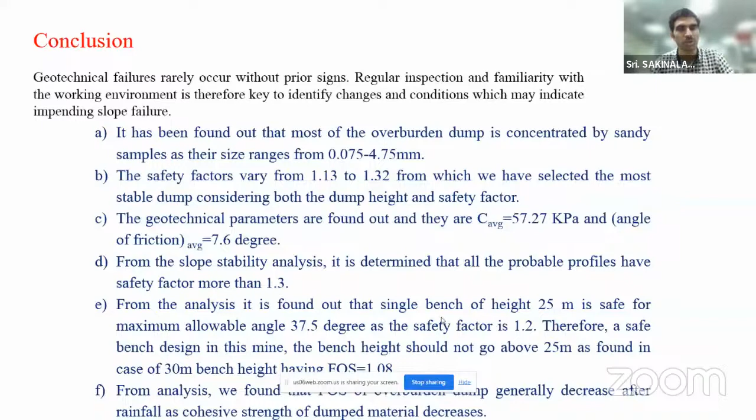Thank you very much, Vikram. Excellent, highly informative information. Your PPT presentation was excellent. Sir, JM sir, are you there? Hello. Sir, please give the remarks, sir. Vikram sir has concluded. Please give the remarks.

Vikram is a research scholar. He nicely gave the presentation. So congratulations. His research work is nicely being done in ISM Dhanbad. In the presentation he dealt with different topics: introduction, factors affecting slope stability, slope failure mechanism, traditional methods for slope stability, numerical modeling for slope stability, modern technology for slope stability analysis, case studies, mitigative measures, and conclusions.

So he has given an introduction to various opencast mines. More than 90% of the coal is from OC, and various problems in coal and OB extraction, and also bench making. More so in OB benches, there are social problems, environmental issues and different accidents. He has shown different mines, and nicely narrated the slope failures and various issues. His research work has been narrated very nicely, though due to shortage of time he could not present fully.